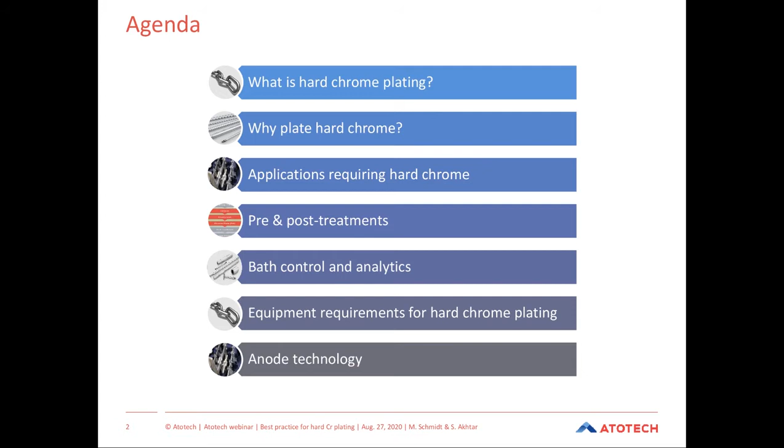So let's start with the first section of the presentation and find out what chrome is all about.

Chrome plating comes in two forms: decorative plating and hard chrome plating. Decorative plating, as the term suggests, is all about achieving the best possible cosmetic finish on the component. Here, the chrome layer is applied on top of copper nickel coatings and serves no other function than to produce a bright finish. It has no significant impact on improving the wear or corrosion resistance of the substrate, and is typically plated to 1 micron thickness for the bulk of decorative applications. Nowadays, chrome can be plated in other color finishes besides the traditional bright blue.

Hard chrome, on the other hand, is plated to improve the lifetime of the component in service. It is usually plated to thicknesses ranging from 5 microns up to 300 microns, depending on the application requirements, and in some rare cases, even higher than 300 microns are plated. The process is used at much higher temperature and cathode current densities compared to decorative plating. So these are the main differences between the two types of chrome plating.

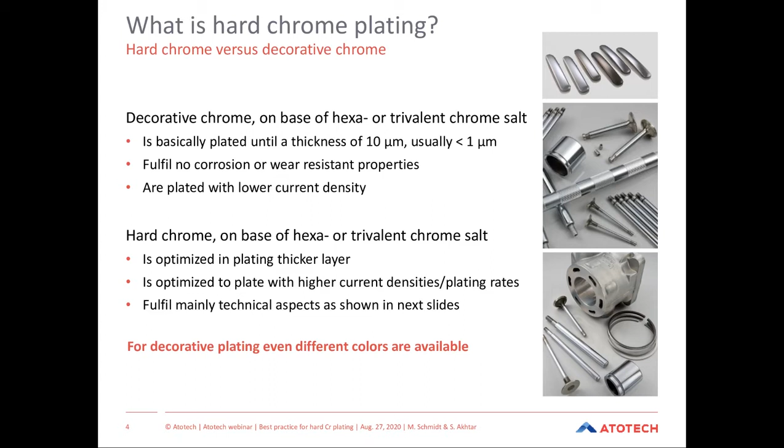The most important properties to consider, and the main reason why we try and plate hard chrome deposits, are number one, usually the hardness, which imparts high resistance to wear, important for prolonging the life of components. Secondly, hard chrome deposits provide good coefficient of friction, meaning good sliding properties, making the coating suitable for extreme environments with reciprocating dynamic movement. Of the metals which are electroplated, chromium has the highest hardness, making it ideal for extending component life in severe industrial environments.

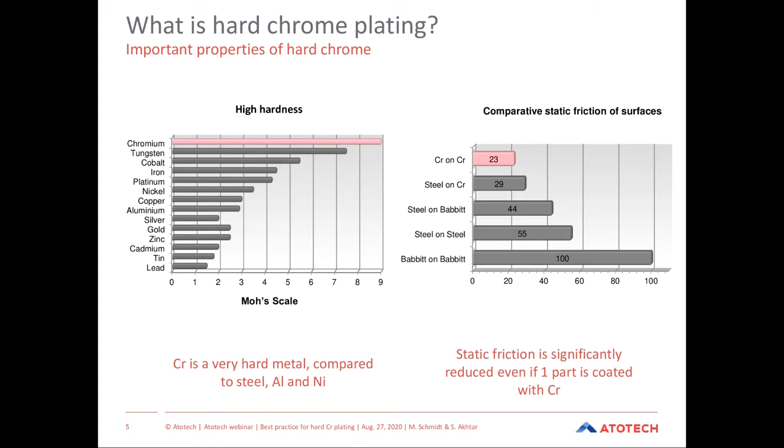Atotech offers a wide variety of electrolytes to meet almost every type of plating required within the industry for hard chrome plating. Appearance can range anywhere from matte to bright, depending on factors such as thickness, catalyst system, and current.

Temperature used also matters. Many of you are already informed of important regulation changes which are going to be enforced by the EU in the very near future. The latest update is that there is a meeting taking place in September, in which we may expect a final decision to be made by the EU.

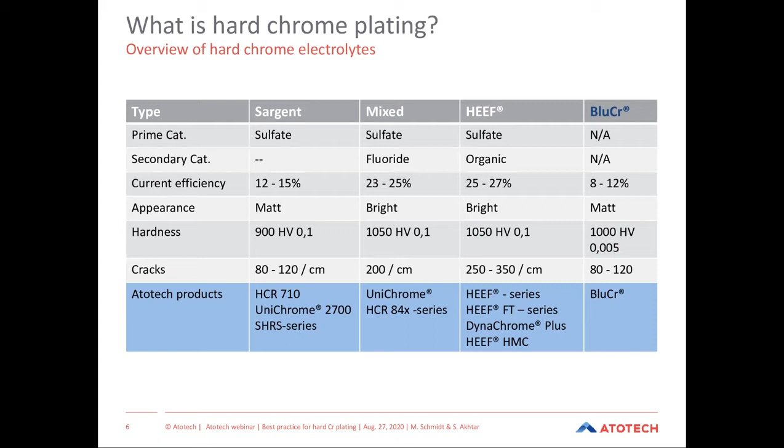Atotech has already taken the necessary steps to counter this, and we have recently introduced into the market our trivalent chrome process, BluCr. This is the first commercially available process in the industry based on trivalent chromium.

Atotech has a rich history, and many of you are already familiar with this, going back to 1927, as being the leading supplier of robust and reliable hard chrome plating processes. As you can see from the timeline, Atotech completely revolutionized the industry back in 1985 with our development of the very first high-efficiency etch-free process, our HEEF 25.

We then introduced our DynaChrome concept for rod plating in 1995. We continue to innovate, and with our HEEF HMC process, we launched this in 2018, and this is our latest offering.

And for sure, in terms of further revolutionary changes, we have introduced our BluCr process, which is our trivalent hard chrome process. Again, we anticipate that we will completely revolutionize the industry with this process.

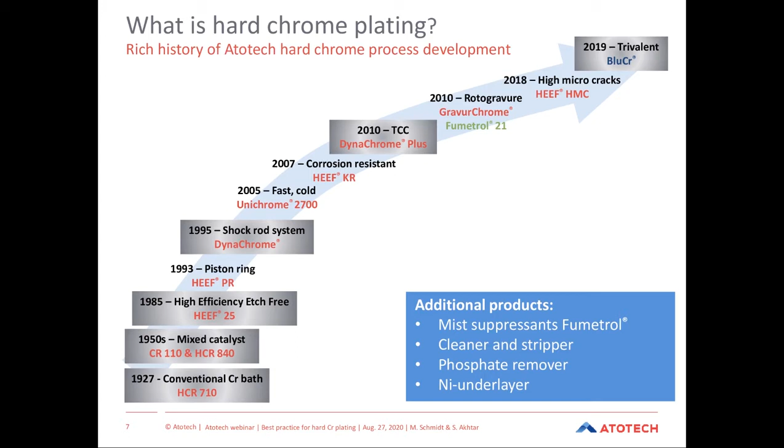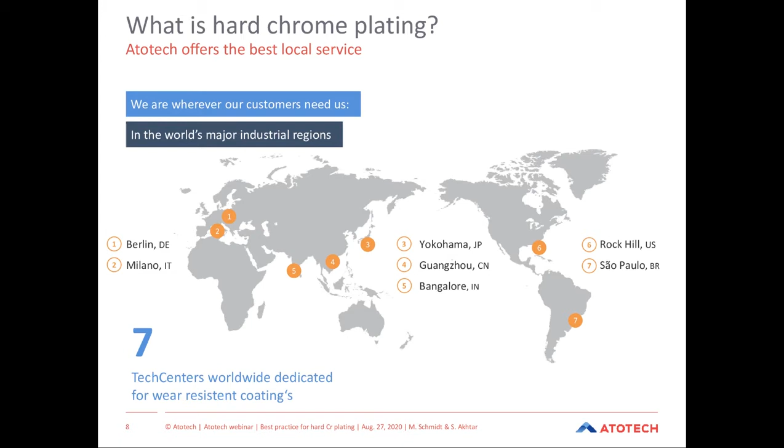An important point to mention is that Atotech is very committed to offering service to our customers, and our service commitment to our customers is second to none, and this is appreciated by most customers. We are currently operating 7 technical centers around the world, which have dedicated equipment for wear-resistant coatings, and we provide sample plating facilities in most of these to support our customer requirements.

Our next section aims to explain important deposit characteristics which provide the reason for using hard chromium plating. So what are the benefits of hard chromium plating? Why is it used to plate components? The main benefits are, number one, the service lifetime of the components is extended. Number two, hard chrome deposits impart superior tribological properties to the component, such as low coefficient of friction, high hardness, which gives rise to high wear resistance, and high corrosion resistance.

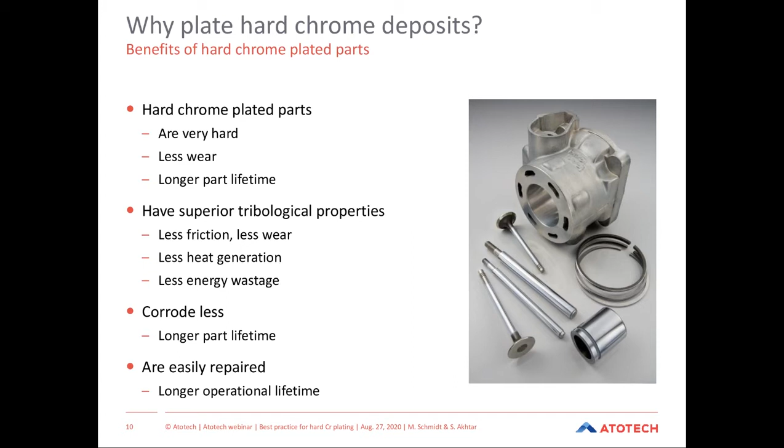One of the characteristics of hard chrome deposits is the formation of cracks within the coating, and these cracks provide important benefits. Let's look at how these form within the coating. A hard chromium coating has cracks, and if we view them from the surface under magnification, these appear as a crazy paving pattern.

The cracks help to spread the corrosion potential and provide lubrication by trapping oil. It is important to form a dense network of fine cracks rather than having a few macro cracks. Macro cracks should be avoided at all costs, as they have a tendency to reduce corrosion protection, providing a pathway to the base material for corrosive media.

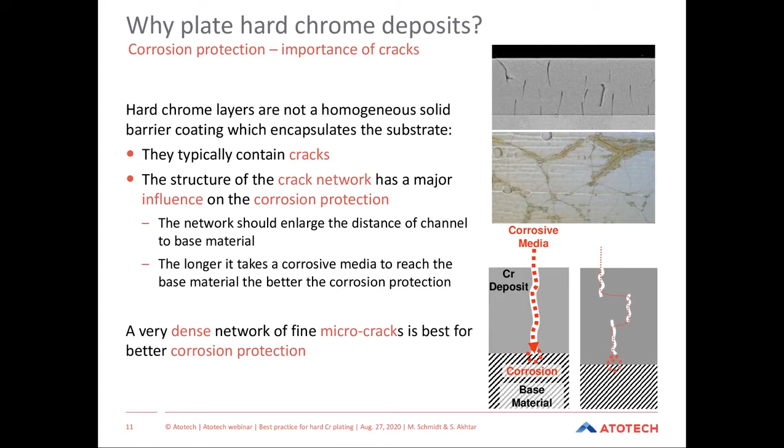As we lose the hydrogen from the coating, this loss forces a change in the structure of the deposit. So we form a body-centered cubic lattice structure, and this change in structure has an impact in terms of a shrinkage in the crystal size structure. We see a 15% shrinkage in the crystal size.

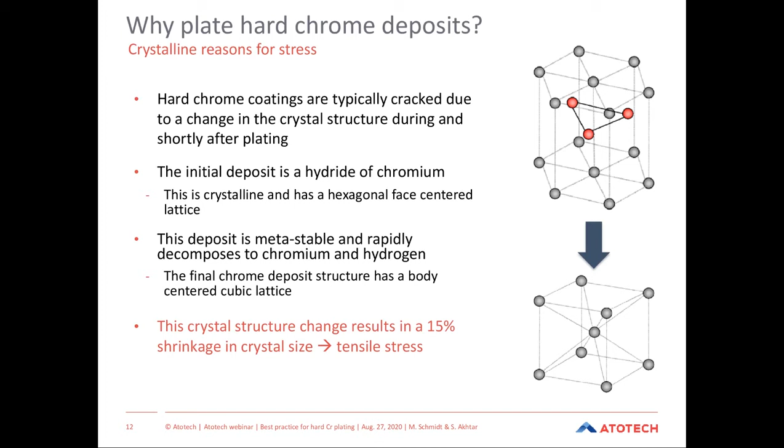So if we go and look at the next slide, which shows us what is happening in terms of the internal stress as the thickness is building up - as the cracks form, we create a pattern of cracks which are staggered, because within the first cracks forming, we get more deposition, those cracks are covered, and then the stress builds up again and the deposit cracks again. This process is repeated as the plating progresses.

So one important criteria for the process is to ensure that we don't crack the deposits in the same place as the crack underneath. Our objective is to form cracks which are staggered to one another, and it is imperative that the cracks are not aligned, otherwise it leads to macro cracks forming. Base material defects, of course, have a big impact, and the effect of aiding alignment - these should be avoided at all costs to avoid corrosion failures.

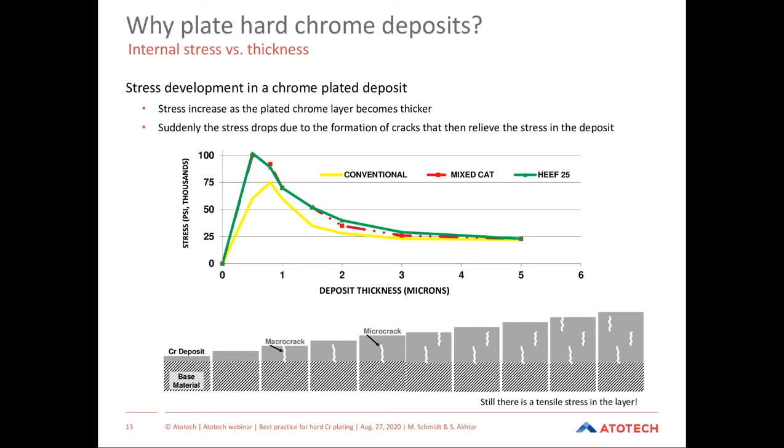With the traditional chrome plating processes, we observe a drop in the crack count numbers as cathode current density increases. To counter this effect, Atotech has developed its HEEF HMC process. HMC stands for high micro cracks. With the HMC process, we can achieve a plus 30% higher number of cracks compared to HEEF 25 at a given nominal 30 amps per square decimeter.

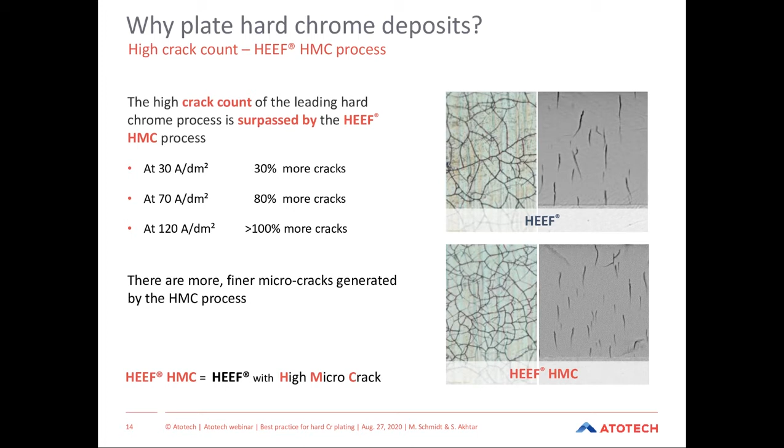But when the cathode current density is increased from 30 to say 120, this difference becomes bigger. The reason for this is that with HEEF 25, as you increase the current density, the crack count reduces in number. But with our HMC process, we maintain the same number of cracks despite the increasing current density.

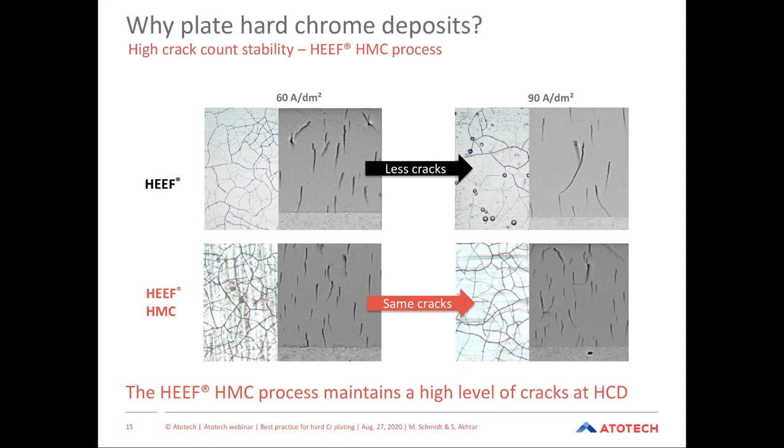So let's now move on to our next section. In this section, we will highlight applications requiring hard chrome. So I now hand over to my colleague, Matthias Schmidt.

Hard chrome is used in the field of electroplating for a various number of different applications in order to increase the lifetime of the components significantly during their operation. The main applications are the automotive industry, the hydraulics industry, and also oil and gas as a very important sector. But it's also used for aerospace and military applications, for railroad, and also for the printing industry, as well as for cold rollers in steel mills to extend the lifetime of the rollers which are finally rolling down the steel.

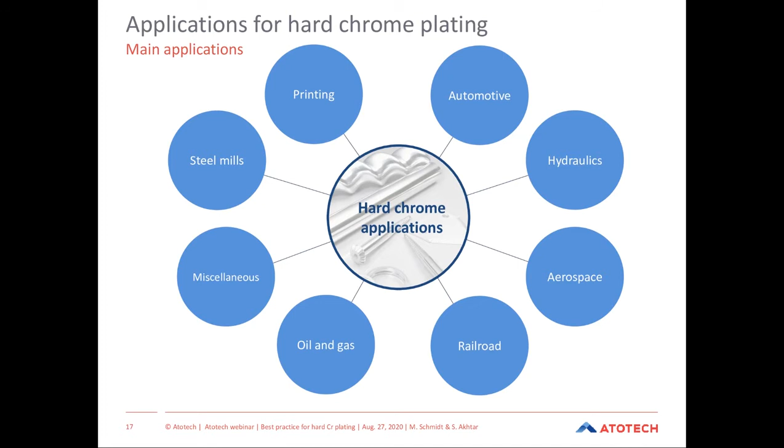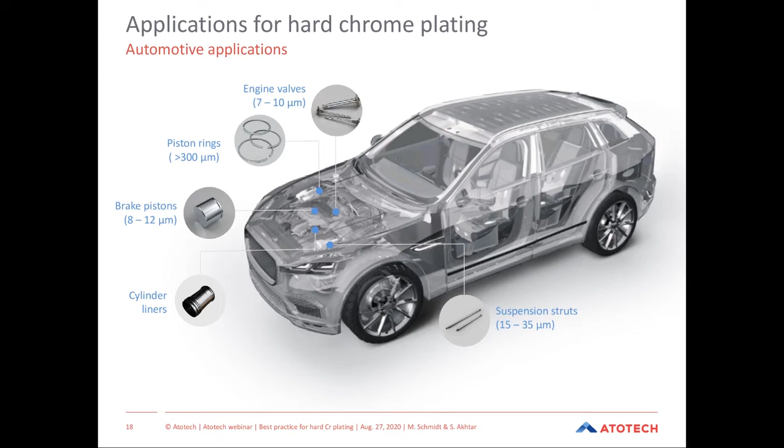If we're looking more in detail to the automotive industry, the typical parts plated are engine valves, piston rings. We have the brake pistons in the brake systems, cylinder liners, and a very, very big field is suspension struts or shock absorbers at the wheel area. For the parts, you can see the typically applied thicknesses next to the parts shown in the pictures.

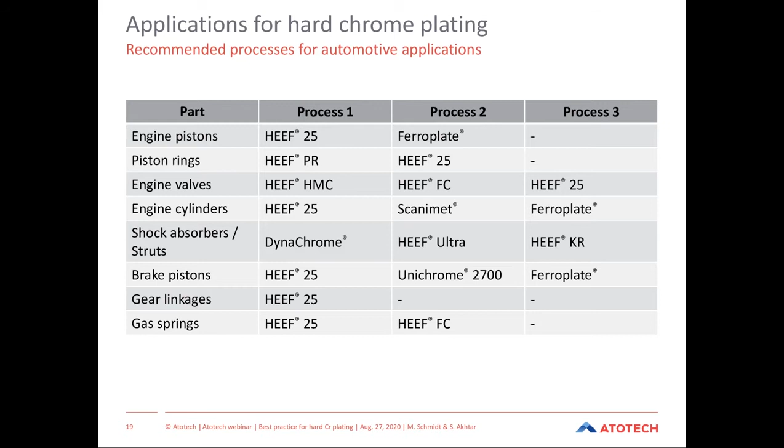These parts usually get very, very high thickness of 250 to 300 micron because they have to withstand very strong, partly very strong chloride or sulfur dioxide atmospheres, which are attacking the chrome very, very strongly.

Another part in this field are pump barrels. This is actually the barrels which transport the oil or gas out of the ground. They are inside plated typically in very, very deep tanks. And since the parts are very long, up to 46 feet, usually there is a shorter anode used, which is traveling inside the barrel during plating up and down in order to provide the current which is needed for the plating.

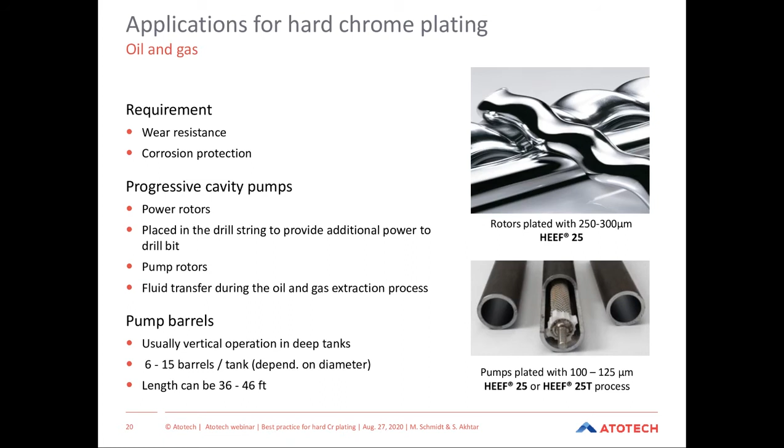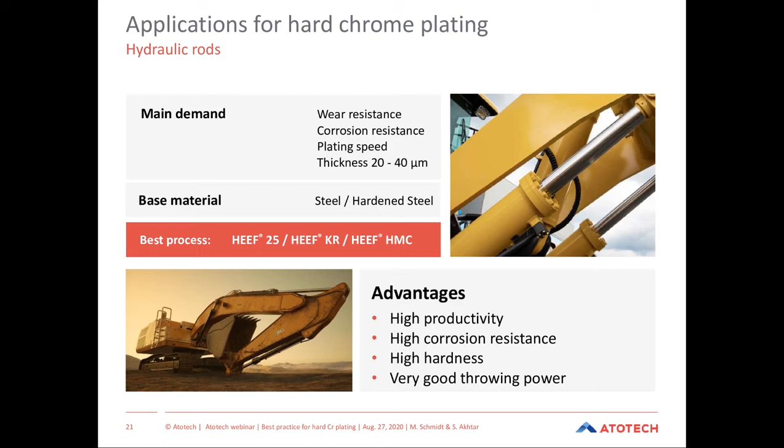The chemistry also had to be improved because the demands for corrosion resistance in this field of industry are continuously increasing. So microcrack number and corrosion protection are very important. Depending on the requirement of how much corrosion resistance is needed, different processes like HEEF 25, HEEF KR, or HEEF HMC can be selected.

Typically the substrate must be in very good quality. So the grinding or mechanical pretreatment operations have to produce a defect and sliver-free surface. In the plating section, of course, the right process for the kind of equipment or for the requirements of the final layer has to be chosen.

The post finishing is very important in order to remove possibly hydrogen which moved into the substrate, for very high tensile strength materials. And it's very important to release the high tensile stress of the chrome plating in order to achieve good performance and very good corrosion resistance.

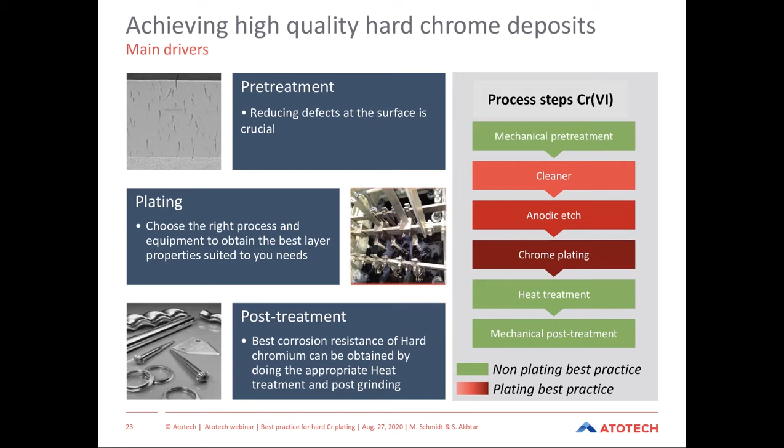It's important to have very good results in each of the sections, because one weak spot in one of these areas can strongly impact the part performance and the final corrosion resistance of the plated part.

Here you see some defects. On the top left side, you can see some defects like slivers which can be produced in the pre-grinding operations. An etching process as the last step before the chrome plating can reduce or remove some of these slivers or defects, but it's usually not able to cover everything.

So in the best or optimum case, these kinds of slivers or defects are removed in the pre-grinding operation. By adjusting the etching parameters, they can be etched away.

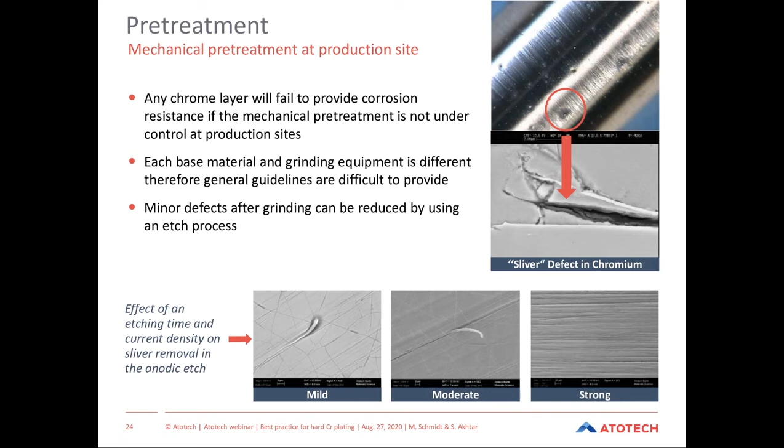You see on the bottom side with mild etching, on the left side, the sliver on the surface would stand up due to the current which is applied. By increasing the etching, in the middle picture, the sliver stands up further, and with strong enough etching parameters, on the right, the sliver will be etched away.

As already mentioned, etching is usually the last step before the plating. Today different options are possible. Typically the etching is carried out in a chrome 6 containing separate etch tank, which is usually recommended, but some customers also etch directly inside the chrome tank.

With the introduction of BluCr, etching in chrome 6 solutions is not possible anymore. So Atotech is also providing chrome 6 and CMR-free etching or pretreatment solutions in order to prepare the substrate for these new types of processes.

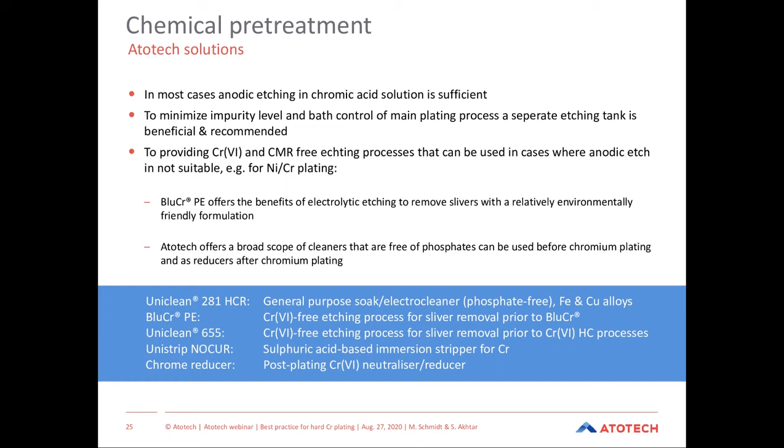We have several cleaners which should usually be phosphate-free for different alloys, for copper and steel. And to complete our portfolio, there are also several solutions for chrome removal, like the Unistrip NOCUR, or chrome reducers or neutralizers, to remove the residues of chrome 6 from the final plated parts.

Another important area in post-treatment is the heat treatment or annealing plus the post-grinding. As already mentioned, the chrome plating has very high tensile stress, and with the annealing, the stress release of the chrome layer actually begins.

In case of very high tensile strength materials, like for aerospace applications with tensile strengths of more than 1,000 Newton per square millimeter, it's recommended to do a heat treatment in order to release or remove the hydrogen, which might have migrated into the substrate and can cause tension and stress if it's not removed.

During the annealing process, the stress release or the crack number increase is not very high. So in any case, to remove the high tensile stress, the post-finishing or post-grinding is required. Here, the main part of the tensile stress is removed and transformed into compressive stress, and with this stress release, the microcrack number of the chrome layer increases significantly. In an optimum case, it doubles or even triples.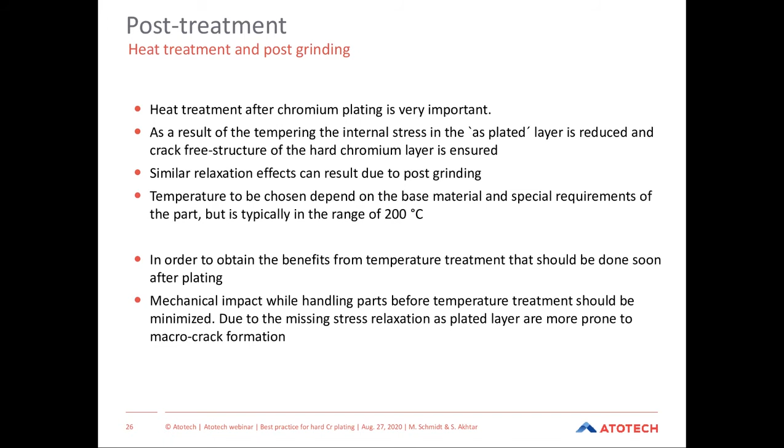Now let's look a bit deeper inside the plating bath and the analytical control of chrome plating baths.

In order to achieve the best quality for customer requirements, Atotech usually supports our customers with the right choice of process, such as high microcrack count, depending on requirements. We typically assist our customers in process control, giving local support and training on how to run the process optimally. For bath maintenance, in order to keep the bath within a certain operating range, Atotech offers analytical methods and local customer support to keep the bath within the right parameters.

In addition, we also take care of safe operation at production sites. We support customers with the switch from typically used solid chromic acid to liquid chromic acid to avoid dust and chrome 6 dust inside the plating shops. We have chrome 6 free additive products to be added, and we support the use of inert anodes to avoid sludge generation from lead tin anodes. We have fume suppressants to keep emissions at a controlled level. We also support our customers with high-end plating equipment for shock absorbers, high-speed plating, or other high-speed platings for applications like engine valves.

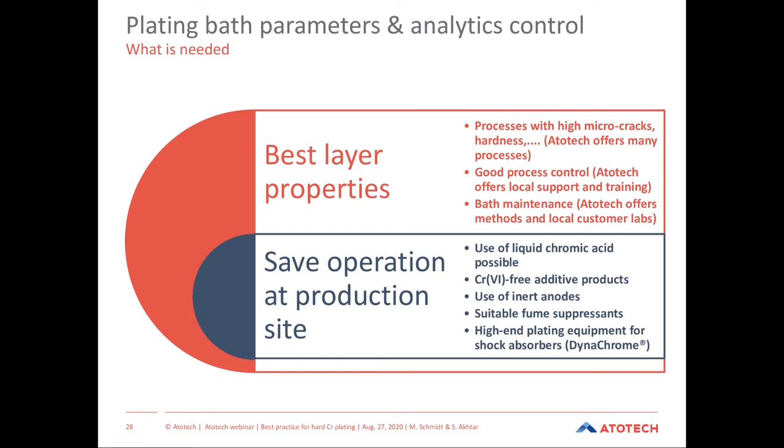The next slide shows you the typical setup of a chrome plating bath. On the left side, you see the typical components in chrome plating baths. We have chromic acid as the main deliverer of the chrome, at an amount of about 250 grams per liter.

Sulfate acts as the first catalyst, making chrome plating possible in the first stage, between 2 and 5 grams per liter depending on application. There can be several catalysts inside the bath, and they should be operated at a level of about 100%.

The contaminants in chrome baths are usually trivalent chrome, formed as a part during plating, and iron, which usually comes from the steel parts during the etching process. We recommend no higher total metal contamination than 18 grams per liter. From that level on, the performance of the layer and the plating goes down significantly.

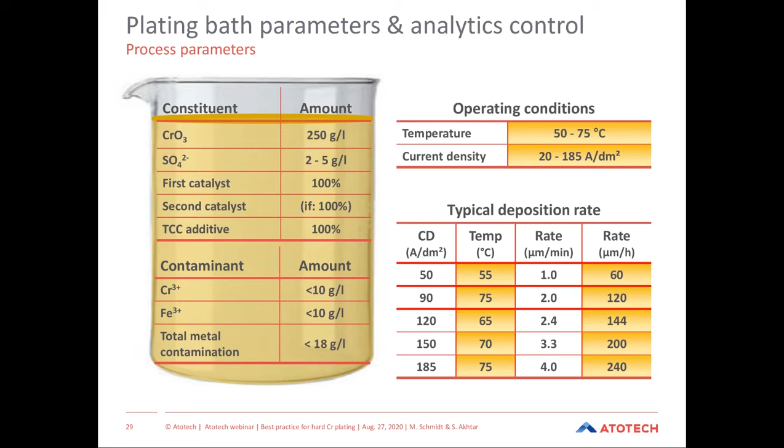We usually operate at 50 to 75 degrees centigrade. These high-end ranges, 75 or 185 amps per square decimeter, are used in high-speed plating in Dynachrome platers or for engine valves. Typically, the operation range of the HEEF process, or most processes, is about 50 amps per square decimeter at 50 to 60 degrees centigrade, which gives a plating rate of about 1 micron per minute, or 60 microns per hour, with the HEEF process.

When it comes to analytical control of chrome plating baths, some measures are taken on the customer side, others are usually done by Atotech. Typically, customers analyze chromic acid and sulfuric acid, in some cases directly on site. It's recommended to do this on a daily or weekly basis, depending on throughput. Some customers can also analyze some of the contaminants like trivalent chrome and iron. Usually, as part of our customer service, Atotech provides full analysis on a monthly basis or every several months, including all components, catalysts, and also special impurities or surface tension or whatever is required.

Usually, we provide this full bath analysis free of charge to our customers, up to a percentage of 2 to 5% of cost in relation to annual turnover. Recommendations for bath additions are also given afterwards.

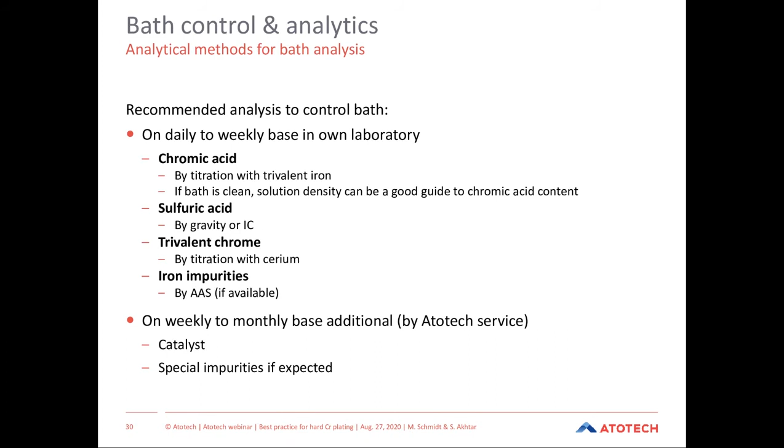Dealing with the automotive industry, analysis tracking is becoming more and more common. So it's also possible to provide spreadsheets where the analytical data is entered, giving a graphical sheet that shows warning and action levels when parameters get out of range.

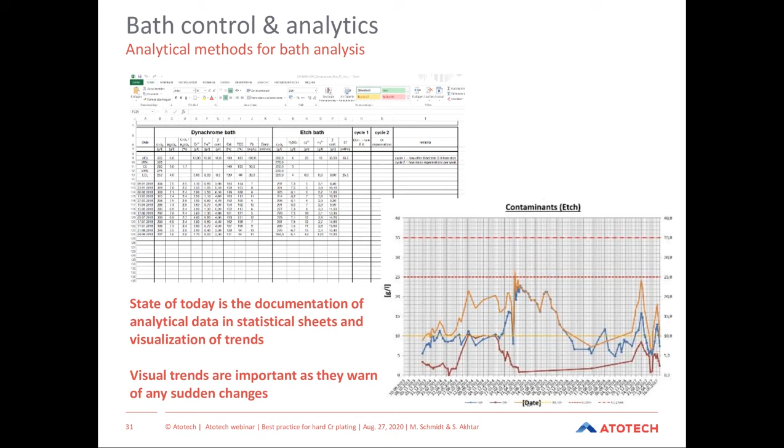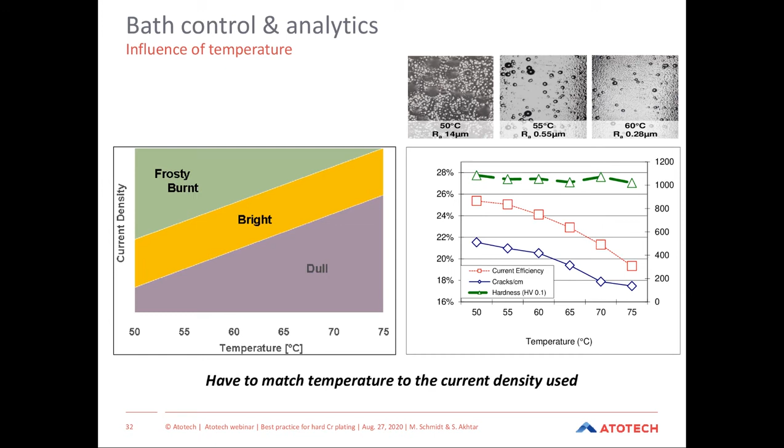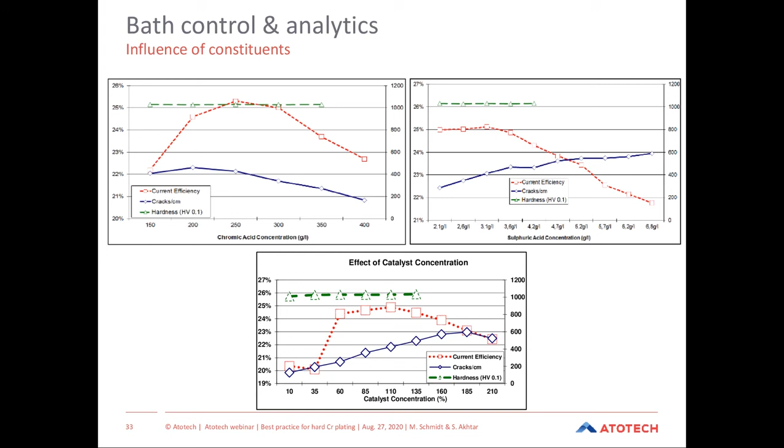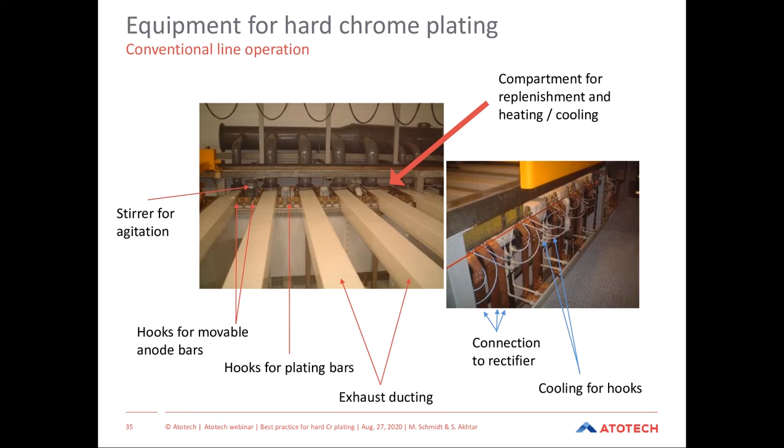Coming to the equipment - let's see, I have to speed up a little bit. There's typical ways. Usually customers use conventional lines, which is actually a plating tank with some stirrers, some heaters, some cooling. The rectifiers are connected over copper bus bars, and the parts are entered vertically into the tank and plated. There are exhaust systems in order to remove the emissions or the spray which can be generated.

There can be storage tanks, and these lines can occupy quite a lot of space.

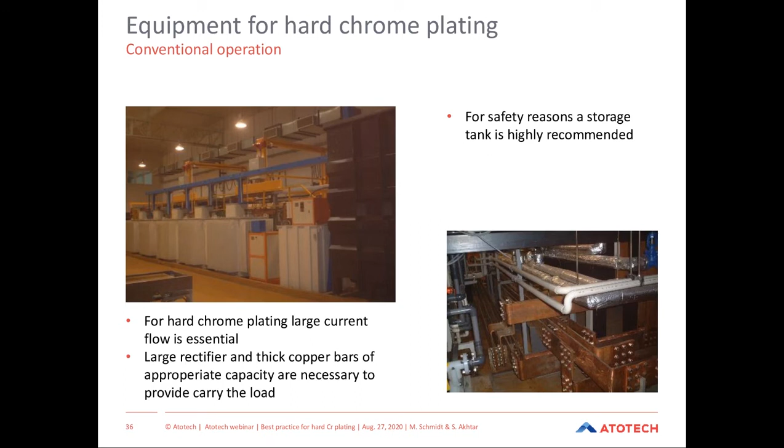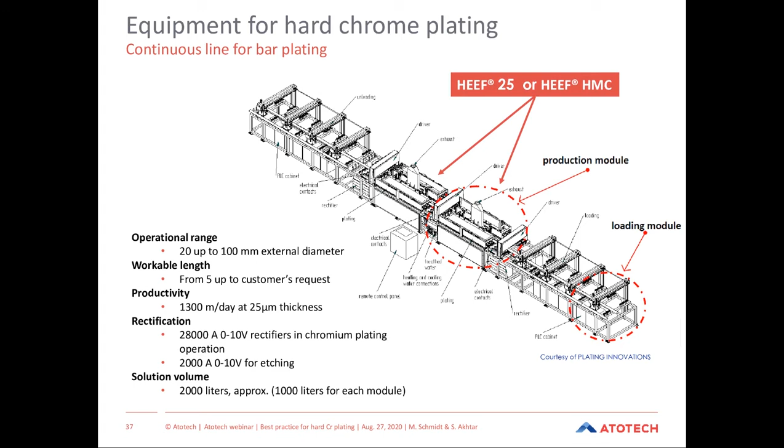These kind of systems can plate up to 1,300 meters per day of hydraulic bars, and this happens with only a volume of 1,000 to 2,000 liters in each module. So the amount of chemistry is significantly reduced in these kind of machines.

These lines are operated worldwide. Atotech is actually all over the world - there are more than 50 of these lines actually in service.

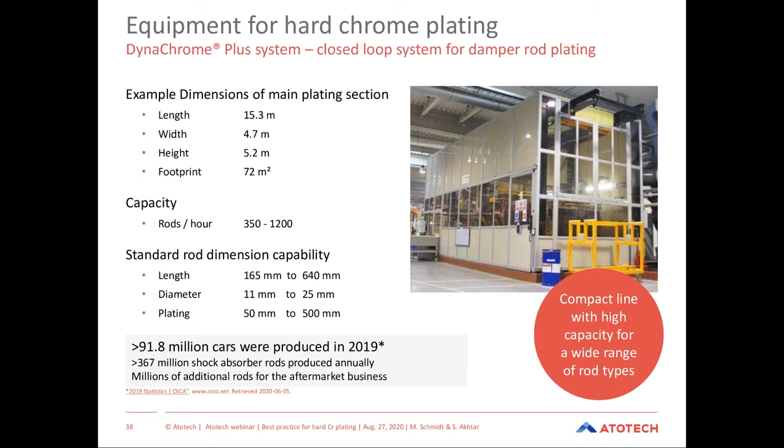Dosing is also very important. So with the new types of lines, the dosing system is getting more and more automatic, so manual additions of chromic acid and catalyst are not required. The dosing pumps are dosing the liquid chromic acid and the liquid additives inside the plating tanks, depending on ampere hours. So bath control is very, very stable.

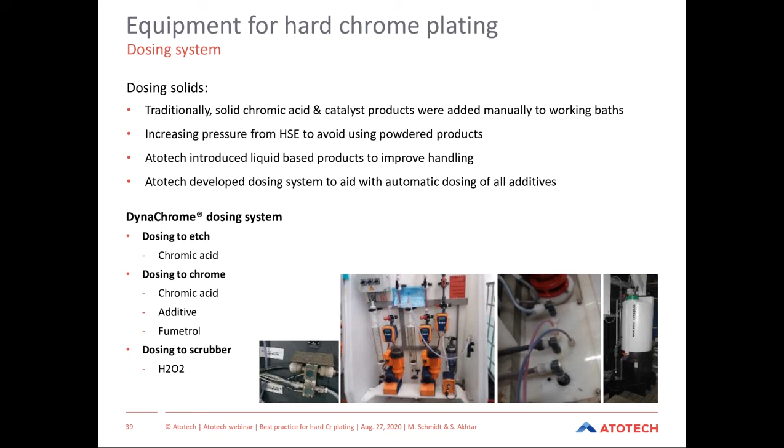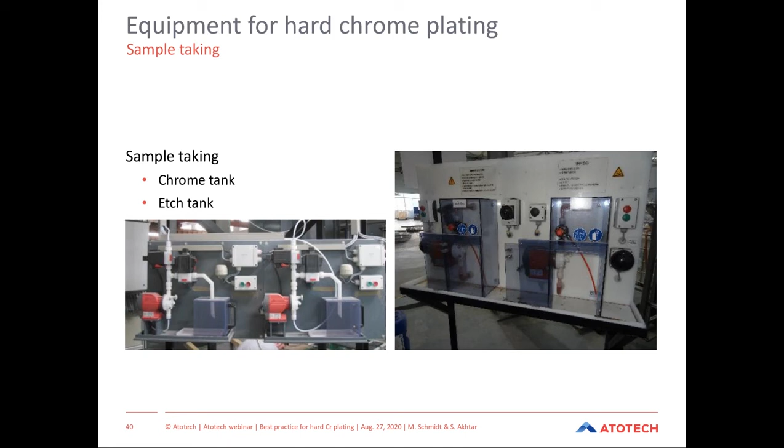As part of the safety features, we also offer automatic sample taking stations, which are connected to the chrome tank, so it's not necessary anymore to enter the plating line to remove the sample. Just by pushing a button, a sample can be extracted. This can also be transferred to conventional plating lines.

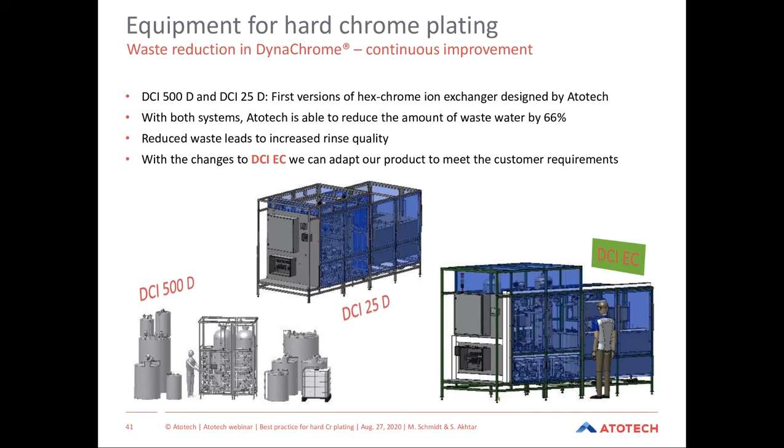As part of the wastewater system, we operate our Dynachrome lines with ion exchangers in order to remove iron and trivalent chrome from the plating bath. This is possible in different resin sizes depending on how much contaminants are built up. The columns can be from 25 up to 500 liters of resin. As part of the high requirements for the automotive industry, these kinds of systems are required to keep the contaminant levels very low to have good quality chrome plating.

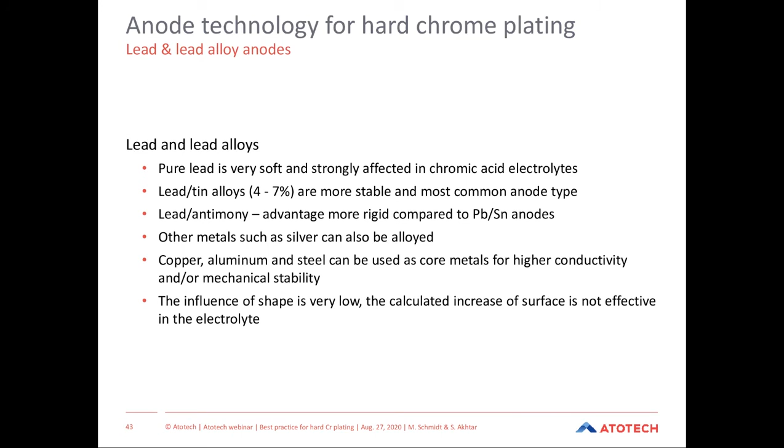Some words on the anodes. Typically, lead-tin anodes are used with 4 to 7% tin. Lead-antimony is also chosen when the anodes get very long, because it's more stable, providing a more stable shape. Also, silver was added in the past in order to avoid or fight chloride contamination.

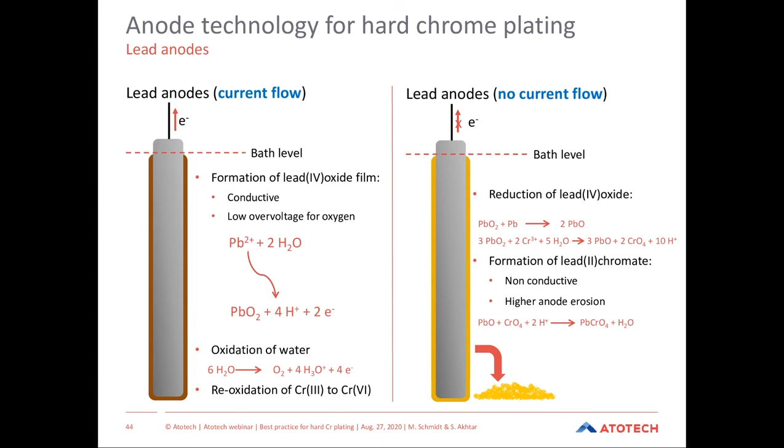On lead anodes, there is typically a lead dioxide layer formed during plating, shown here on the left side. On this layer, the reoxidation of trivalent to hexavalent chrome typically happens. During idle times, this layer is destroyed by the chrome bath, and if the anodes remain very long in solution without current, lead chromate can form, which will also reduce the shape or diameter of the anodes.

For that reason, the industry nowadays tends to move over to platinized titanium anodes. It's a titanium mesh with a thin platinum layer. The shape will be constant over the complete lifetime, so there's no bending or change on these anodes until the platinum layer is worn off.

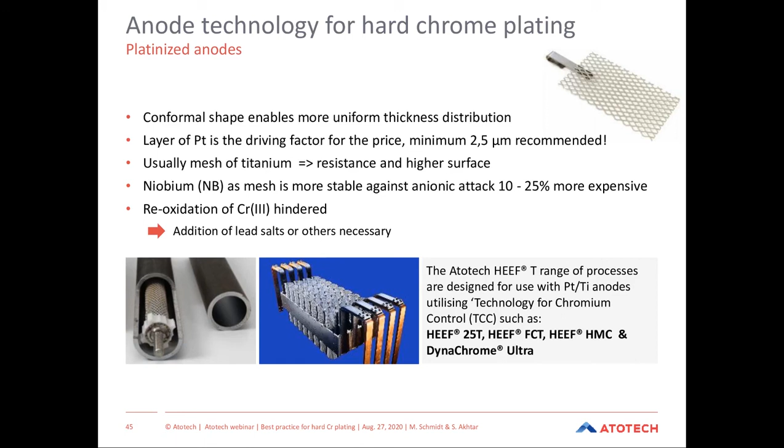The problem with these anodes is that the reoxidation of trivalent to hexavalent chrome is not very efficient on the platinum layer. For that reason, Atotech has developed several processes for use with platinized titanium anodes, which we call TCC, Technology for Chromium Control. These processes have a special additive which improves the reoxidation of trivalent to hexavalent chrome on the platinized titanium anodes, like HEEF 25T, HEEF FCT, HEEF HMC, and also the Dynachrome Plus and Dynachrome Ultra processes.

The platinized titanium anodes are also wearing - the platinum layer is reduced during operation, which means the lifetime has an end. Typically, lead-tin anodes are changed every 1 to 2 years. Platinized titanium anodes last definitely longer. Usually the lifetime depends on the current applied and the throughput - it's between 3 and 7 years, also depending on the platinum thickness of the anodes.

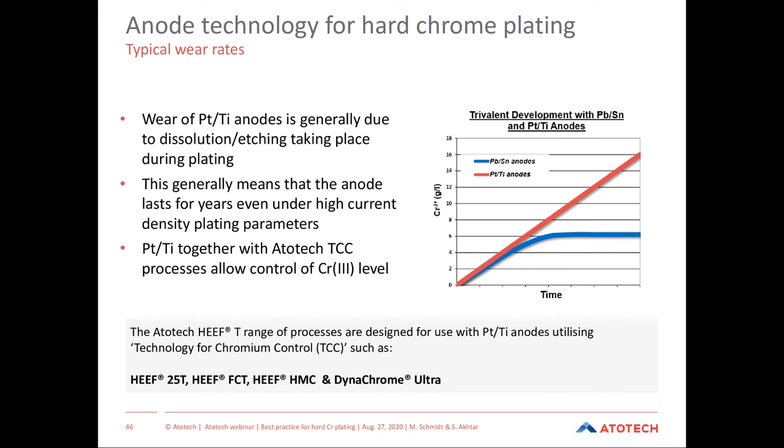Yes, so much from my side. For the last slide of the summary, I will now hand back over to Shakil.

Thank you, Matthias. To summarize our presentation, we can say that hard chromium deposits offer a unique set of properties which assist in improving the service life of components, such as resistance to wear, achieved through the high hardness of the chromium layer, low coefficient of friction, and high crack count in the deposit which can retain oil for lubrication. Superior corrosion resistance is achieved by the preparation steps of the substrate surface prior to plating, and the optimum crack count number produced by the best operating parameters of the plating process, as well as post-finishing steps applied. The coating is highly stressed as plated due to changes in the chromium hydride structure, giving rise to deposit shrinkage. The stress is relieved by formation of cracks in the deposit.

Pre-treatment and post-treatment steps are very critical to achieving the highest level of corrosion protection and can contribute to crack formation. Atotech offers a full range of plating processes to meet all aspects of hard chrome plating requirements, and provides extensive service and support to its customers.